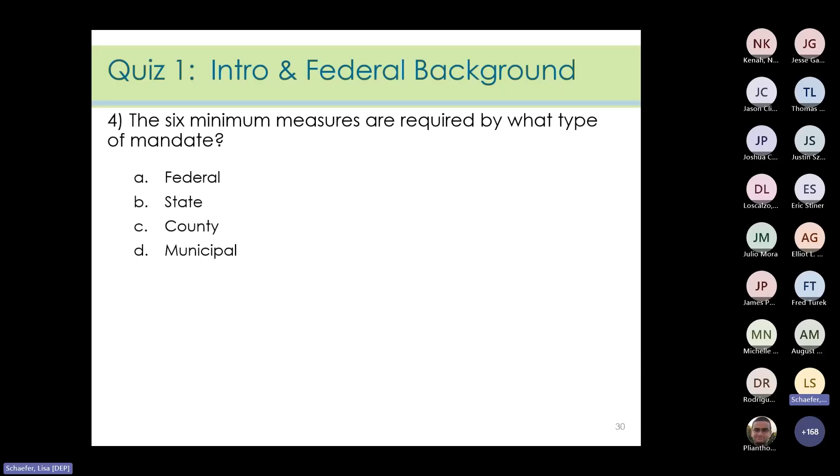The 6 minimum measures are required by what type of mandate? The answer is A. The National Pollutant Discharge Elimination System, or NPDES, Phase 2 stormwater regulations require that the 6 minimum measures be implemented for small MS4s.

Question 5: Reviewing site plans is required to comply with which statewide basic requirement? The answer is C. The post-construction statewide basic requirement requires that the permittee develop, update, implement, and enforce its stormwater management program to address runoff in new development and redevelopment, including reviewing projects to ensure they comply with the stormwater management rules.

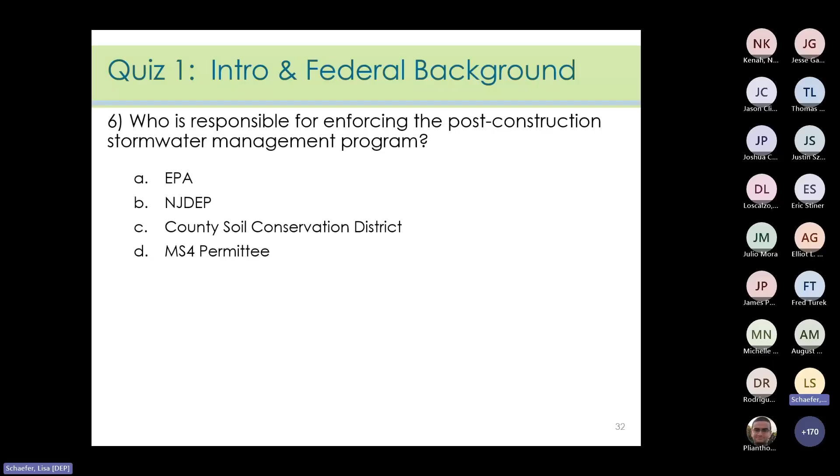Question 6: Who's responsible for enforcing the post-construction stormwater management program? EPA, NJDEP, the Soil Conservation District from the county, or the MS4 permittee? The answer is D. The MS4 permittee is required to develop, update, implement, and enforce its stormwater management program to address runoff in new development and redevelopment.

Question 7: Under the SCO pursuant to the 2026 rule amendments, what is the definition of major development? Is it the disturbance of 1 or more acres of land since February 2nd, 2004? The creation of 1/4 acre or more of regulated impervious surface since February 2nd, 2004? Or the creation of 1/4 acre or more of regulated motor vehicle surface since March 2nd, 2021? Or is it the reconstruction of 1/4 acre or more of motor vehicle surface or impervious surface since January 20th, 2026? The answer is E, all of the above.

Pursuant to the MS4 permit and NJAC 7:8, the SCO shall define major development as defined in subsection 1.2 of the Stormwater Management Rules.

Question 8: Which of these can be used to demonstrate compliance with the water quantity design and performance standard? There are 3 here, and the answer is B. Design stormwater management measures so that the post-construction peak runoff rates for the current and projected 2, 10, and 100-year storm events are 50, 75, and 80% respectively of the pre-construction peak runoff rates.

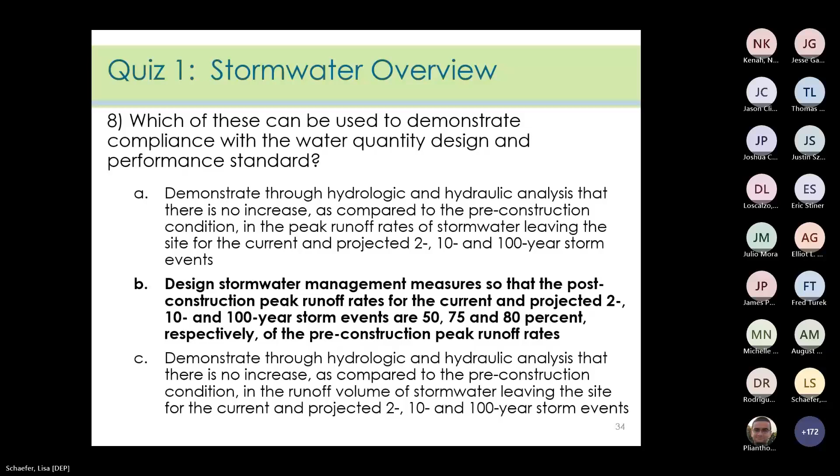Question 9: Which of the following is the New Jersey water quality design storm? Is it 1.25 inches in 2 hours, or 1.25 inches in 24 hours? Or is it the 1-year storm? Or is it 1 inch of rainfall? The answer is A. The New Jersey water quality design storm is a storm with a variable intensity that results in 1.25 inches of rainfall in 2 hours.

Question 10: For a project with 2 acres of asphalt parking, where the base of the motor vehicle surface will be completely removed and replaced with new roadbed materials and paved, is the project subject to the water quality design standard? The answer is yes.

Pursuant to NJAC 7:8-1.2, the replacement with new roadbed material is a disturbance and is also a reconstruction of motor vehicle surface. Therefore, the project is subject to the water quality standard at NJAC 7:8-5.5A.

Question 11: Which of the following would meet the groundwater recharge standard? The answer is D. Infiltrating the increase in the projected 2-year storm volume or maintaining the average annual groundwater recharge are the two options for meeting the groundwater recharge standard.

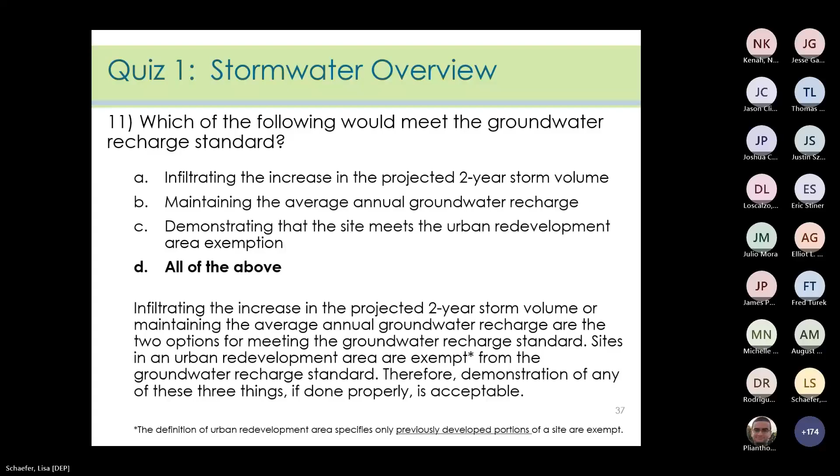Question 12: True or false? A project located in a tidal flood hazard area is always exempt from the water quantity standard. The answer is B, false. In tidal flood hazard areas, the water quantity standard does not apply only if the applicant can demonstrate that the increased volume of stormwater runoff will not increase flood damage below the point of discharge.

In tidal flood hazard areas, stormwater runoff quantity analysis is required unless the design engineer demonstrates through hydrologic and hydraulic analysis that the increased volume, change in timing, or increased rate of the stormwater runoff, or any combination of the three, will not result in additional flood damage below the point of discharge of the major development.

No analysis is required if the stormwater is discharged directly into any ocean, bay, inlet, or the reach of any watercourse between its confluence with an ocean, bay, or inlet and downstream of the first water control structure.

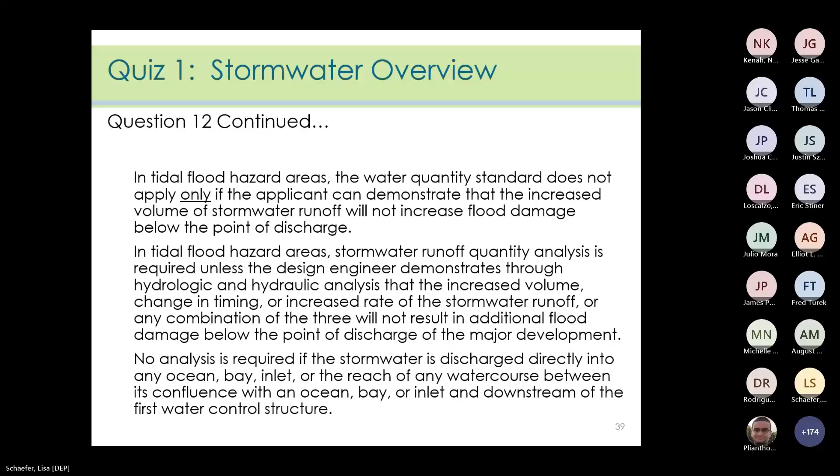Question 13, true or false? BMPs from table 5-3 can be used to meet stormwater quality requirements without obtaining a waiver or variance from NJAC 7:8-5.3. The answer is false. BMPs from table 5-3 can be used for stormwater runoff quantity only. For them to be used for stormwater runoff quality, a waiver or variance from subsection 5.3 in the rules must be obtained.

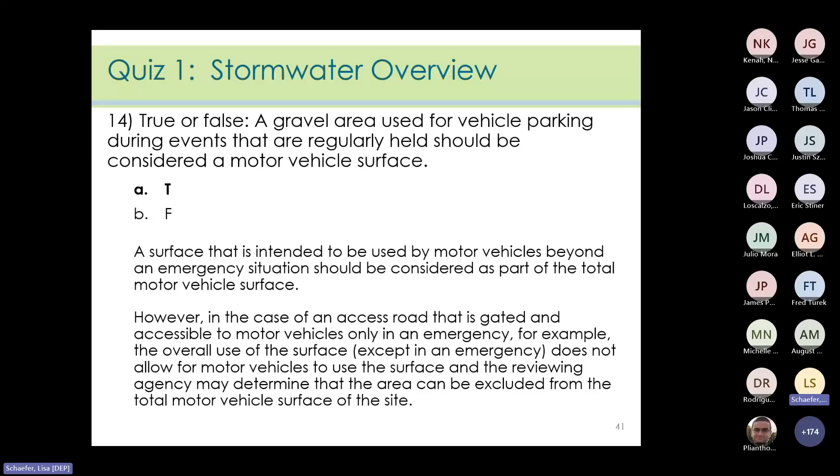Question 14, true or false? A gravel area used for vehicle parking during events that are regularly held should be considered a motor vehicle surface. The answer is true. A surface that is intended to be used by motor vehicles beyond an emergency situation should be considered as part of the total motor vehicle surface. In the case of an access road that is gated and accessible to motor vehicles only in an emergency, the overall use of the surface, except in an emergency, does not allow for motor vehicles to use the surface, and the reviewing agency may determine that the area can be excluded from the total motor vehicle surface of the site.

Question 15. Which of the following is required in a maintenance plan? Cost estimates, specific preventative and corrective maintenance tasks, the name, address, and phone number of the responsible party, or all of the above? The answer is all of the above. All of these things must be included in the maintenance plan.

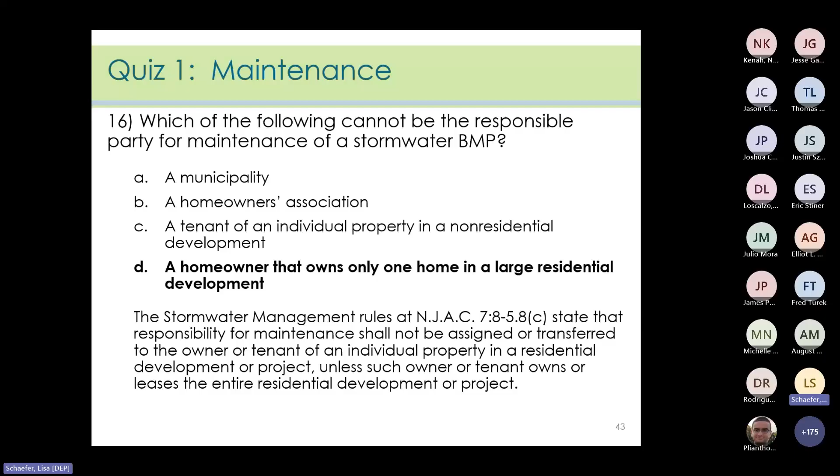Question 16. Which of the following cannot be the responsible party for maintenance of a stormwater BMP? Is it a municipality, a homeowners association, a tenant of an individual property in a non-residential development, or a homeowner that owns only one home in a large residential development? The answer is D. The stormwater management rules at NJAC 7:8-5.8C state that the responsibility for maintenance shall not be assigned nor transferred to the owner or tenant of an individual property in a residential development or project unless such owner or tenant owns or leases the entire residential development or project.

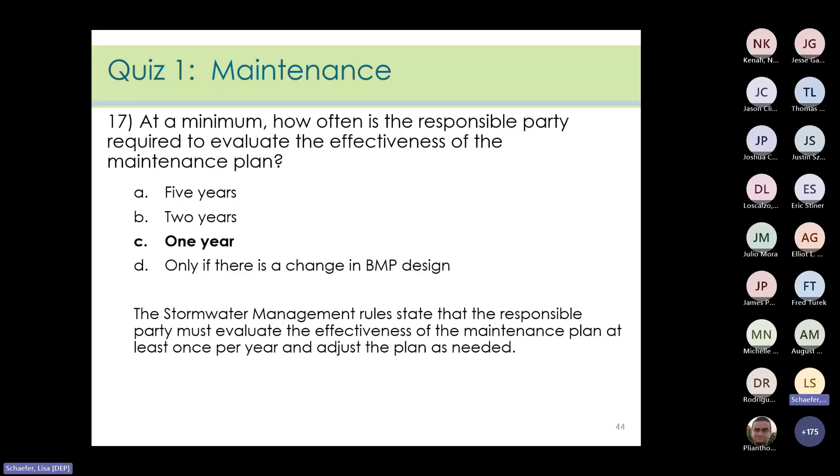Question 17. At a minimum, how often is the responsible party required to evaluate the effectiveness of the maintenance plan? Is it 5 years, 2 years, 1 year, or only if there's a change in the BMP design? The answer is 1 year. The stormwater management rules state that the responsible party must evaluate the effectiveness of the maintenance plan at least once per year and adjust the plan as needed.

17. I'm sorry. What? Yeah.

Question 18, true or false? All maintenance plans for stormwater management measures must be recorded on the deed of record for each property on which the maintenance must be undertaken if the responsible party is not a public agency. The answer is true. Per subsection 5.8 of the stormwater management rules under item D, if the person responsible for maintenance is not a public agency, the maintenance plan and any future revisions shall be recorded upon the deed of record for each property on which the maintenance must be undertaken.

Question 19, true or false? When choosing a hydrodynamic separator type MTD, the inlet configuration, such as the angle and number of inflow pipes, must strictly match the inlet configuration described in the NJCAT verification report. The answer is true. When the NJDEP certifies an MTD, such as a hydrodynamic separator type, only the configuration as tested by NJCAT is certified to provide the indicated TSS removal rate. Manufacturers will frequently offer other configurations claiming certification, and these will include an inlet or outlet configuration that is not 180 degrees apart and may have multiple inlet pipes.

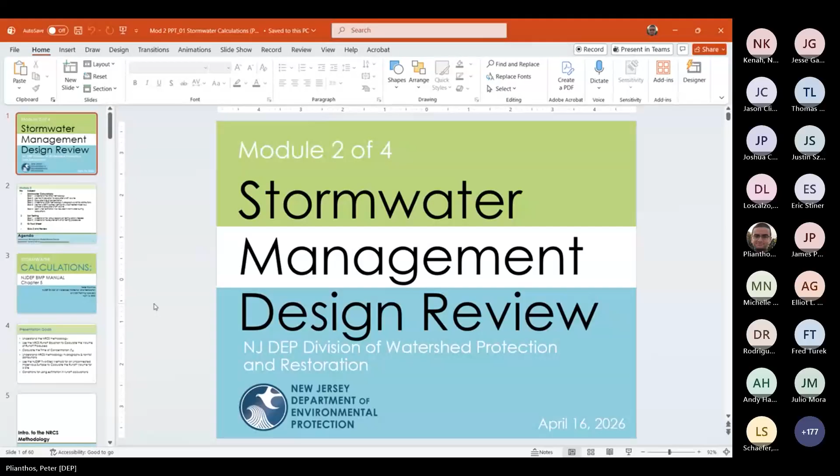All right, so good afternoon, everyone. Once again, my name's Peter, and let's really get into Module 2 now of the Stormwater Management Design Review course after Lisa went through that quiz review that was carried over from Module 1.

So here's the agenda for today for the remainder of Module 2. We'll begin the day with a presentation on stormwater calculations presented by myself. Then we'll move on to soil testing presented by Lisa Schaefer. And lastly, green infrastructure, focusing on the GI fact sheet, also presented by Lisa Schaefer. After those three presentations, we'll have quiz number 2, and the end of the day will be the quiz review, which will be presented by me.

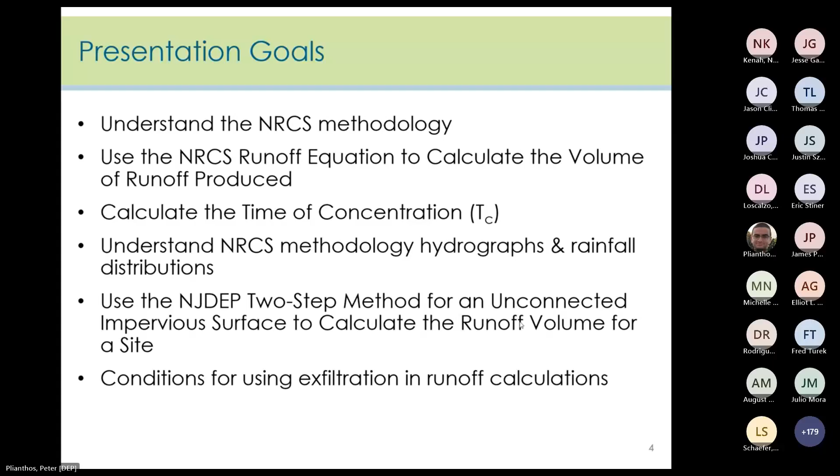So first, we'll take a closer look at the NRCS methodology.

Per NJAC 7:8 5.7, the design engineer shall calculate runoff using the NRCS methodology, as described in the National Engineering Handbook, or NEH, and as additionally described in Technical Release 55, or TR55. However, please note that the TR55 manual has been superseded by Part 630 of the National Engineering Handbook, and if you are using the TR55 manual, you'll be using outdated equations and values. A link to the NEH is provided at the bottom of this slide for that reason.

As mentioned before, the NRCS method is used to calculate the peak flow rate and volume of runoff and to produce hydrographs, which are flow of water over time. The NRCS method uses unit hydrographs, rainfall depths, rainfall distributions, curve numbers, and times of concentration, which are all dependent on geographical and topographical differences that affect how rain will fall over a specific area. We'll review all of that on the upcoming slides.

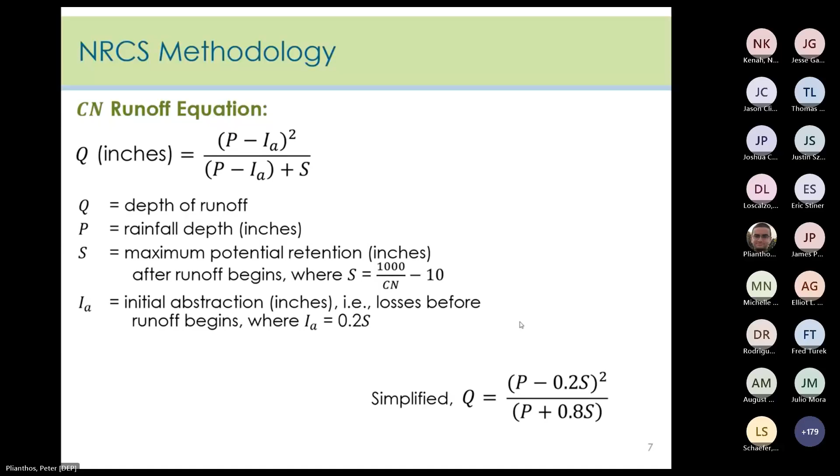The curve number, once again abbreviated CN, is an empirical parameter used for predicting infiltration and direct runoff from rainfall. CN is a function of the hydrologic soil group, or HSG, and the land cover, such as woods, open space, agricultural use, impervious cover, etc.

HSG A is the most permeable soil group and produces the least amount of runoff when thoroughly saturated. The designations then go alphabetically from B to D, with D being the least permeable soil group and having the highest runoff potential.

The preliminary HSG classification can be found on the NRCS Web Soil Survey website, but further investigation may be necessary, and Lisa will dive deeper into all of this in the next presentation. Once you have determined your HSG, or are using the defaults that are allowed, you can determine the CN value to input.

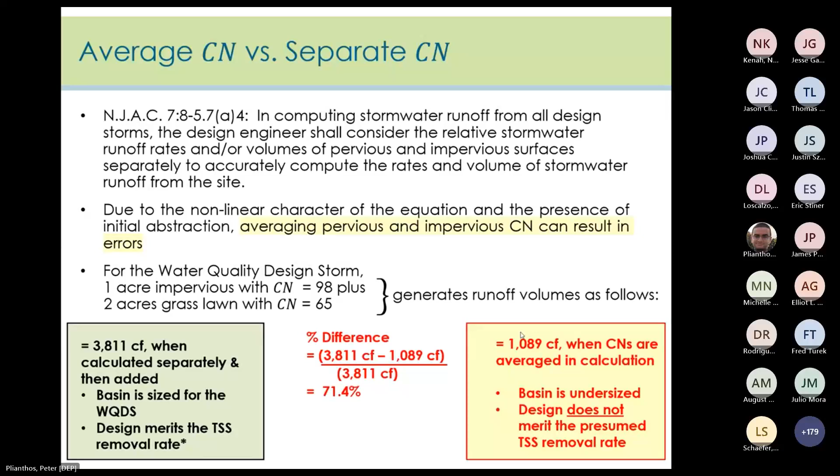Starting with the CN values for each segment from Table 9-5 in the National Engineering Handbook, the CN value for the pervious area, which is lawn area with HSG of A, is 39. And as mentioned before, the CN for the impervious area is always 98.

Next, using the CN runoff equation, we'll calculate S, which again is the maximum potential retention, also known as the maximum infiltration capacity of the land surface and soil. This is where the major difference is. You have 15.64 for the lawn area and 0.204 for the impervious area.

When talking about time of concentration and point of analysis, we are talking about a drainage area. A drainage area is a portion of land where all the stormwater runoff produced by that area converges to a single point, a point of analysis.

It's extremely important to remember when reviewing plans that a drainage area does not stop at the property line. You have to look at the offsite area surrounding the property. A project can have one drainage area or multiple. There can be small drainage areas and big drainage areas. It really depends on the topography and potentially the stormwater management infrastructure, because perhaps, even though topographically the water is going one way, if it enters a stormwater management system, it could be directed somewhere else.

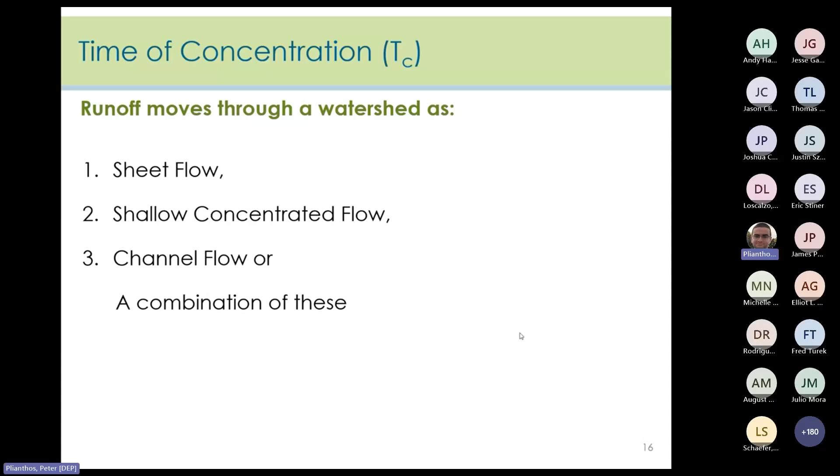Looking at these more closely, sheet flow is usually at the headwaters and over plane surfaces. This is where runoff forms a sheet that is low in energy and also low in velocity and depth, so the depth would be less than 0.1 feet.

Shallow concentrated flow occurs where runoff begins to merge and concentrate, hence the name. The velocity and depth increase, so there's a slightly higher energy, but there is still no well-defined channel.

And lastly, channel flow can be seen in aerial photographs and on GIS and USGS maps, blue lines for streams or dashed lines for pipes. It is a well-defined channel, open or closed, so a stream or a pipe, that has deeper and faster flow, so that would be the highest energy level.

Now that we've covered the properties that affect the time of concentration and the types of flow you can expect to see, let's take a look at the actual equations.

From the National Engineering Handbook, the velocity method can be used to calculate the time of concentration. This method assumes that the time of concentration is the sum of the travel times for each segment of flow along the hydraulically most distant flow path. We'll talk about what a segment is over the next few slides.

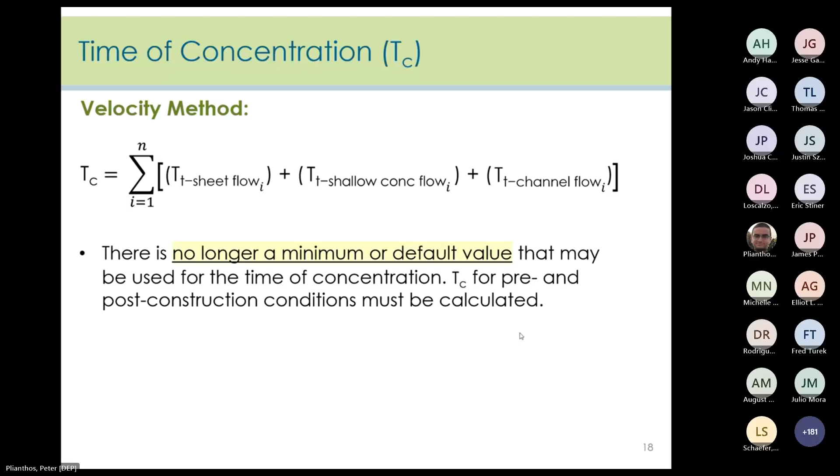Additionally, the maximum sheet flow length, as per the National Engineering Handbook, is 100 feet for pre-construction conditions. However, the sheet flow can be less if there is a physical constraint that prevents sheet flow from occurring, such as coming into contact with a curb, swale, or inlet. But the maximum is 100 feet.

Now for the post-construction conditions, the maximum sheet flow length should not exceed either the McCuen-Spiess limitation or 100 feet, whichever is less.

So if the sheet flow length calculated by the McCuen-Spiess limitation criteria is less than 100 feet, you have to use that length. But if the sheet flow length determined by the McCuen-Spiess limitation is more than 100 feet, the sheet flow length must be limited to 100 feet.

And remember, the sheet flow length can be less than both of these values if there is a physical constraint present that prevents sheet flow from occurring, just like in the pre-construction conditions.

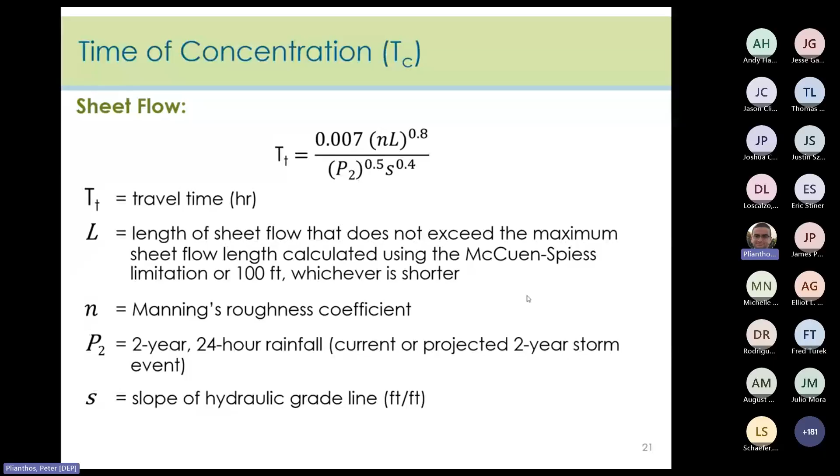Diving into Manning's roughness coefficient, values for sheet flow can be found in Table 15-1 of the National Engineering Handbook. For sheet flow, the roughness coefficient includes the effects of surface roughness, the effects of raindrop impact, the effects of obstacles, and the effects of erosion and transport of sediment. And the values range from 0.011 for smooth surfaces to 0.8 for dense underbrush.

However, per Chapter 5 of the BMP manual, the maximum value that can be used for woods in New Jersey is 0.4, which corresponds to light underbrush. So you should never see an N value greater than 0.4 being used for sheet flow. If you do, it's wrong.

Diving into the 2-year 24-hour rainfall, typical values in New Jersey range from 3.2 to 3.5. The overview presentation for Module 1 described how to get the rainfall depth for a location using either the county data or the NOAA data. So I won't go over that again.

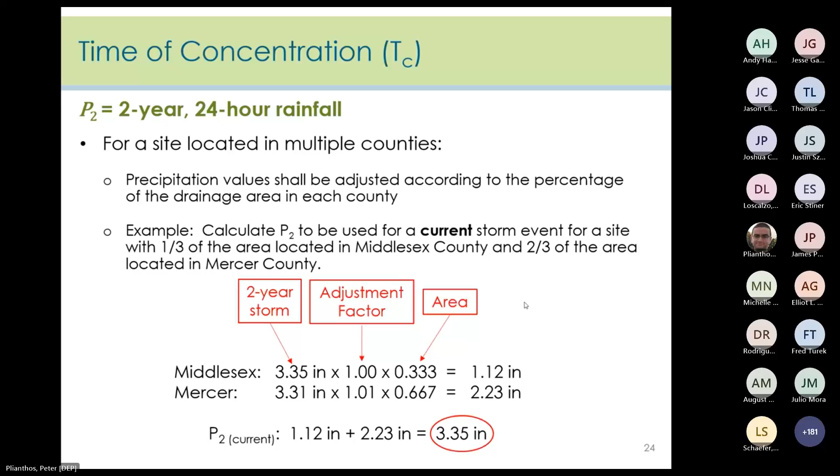All right, so that was everything for sheet flow. Let's take a look at the equations for shallow concentrated flow.

Travel time for shallow concentrated flow is determined using a very simple distance over speed relationship. More specifically, the travel time is equal to the flow length divided by the average velocity times a conversion factor of 3600 to convert seconds to hours.

And per the National Engineering Handbook, it is assumed that shallow concentrated flow can be represented by one of 7 flow types, and that's how the velocity will be determined.

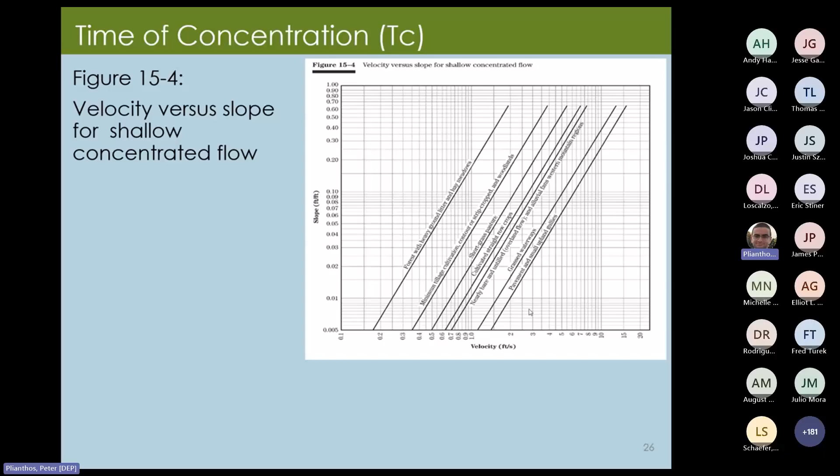You need Manning's roughness coefficient, which can be obtained from standard hydraulics textbooks, the length of the channel, the hydraulic radius of the channel, and the channel slope.

More specifically, the hydraulic radius is the cross-sectional flow area of the channel divided by the wetted perimeter. And the wetted perimeter is the length of the cross-section actually in contact with the water.

This hydraulic radius parameter aims to take into account the effects of friction along the channel, because that friction slows the water down.

Please note that this equation can be used for open channels, like streams and rivers, and for partially full gravity pipes, so your typical stormwater pipes. However, if you see a pressurized pipe, that is a completely different equation. Thankfully, you shouldn't see that too often.

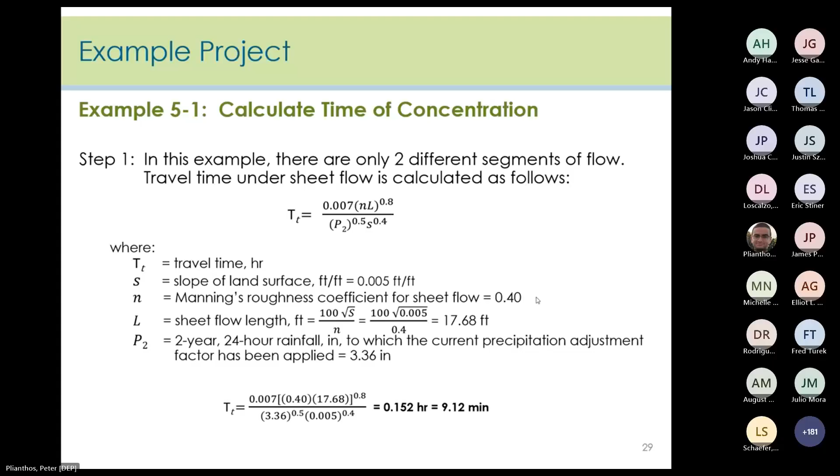Now, because the entire flow path is 1,000 feet, but the sheet flow was only 17.68 feet, we have to calculate the travel time for shallow concentrated flow over the remaining 982.32 feet.

Using figure 15-4 from the National Engineering Handbook, we know that the land cover is woods, and we know that the slope is 1%, or 0.01 feet per feet. So if we go up to 0.01 on the y-axis and go right over to where our land cover intersects with this slope, we can then go down to the x-axis to get our velocity, which is 0.25 in this case.

Plugging all of that into our equation, we get a travel time of 65.49 minutes. And finally, the time of concentration is the sum of travel times for each segment of flow along the hydraulically most distant flow path, which is 74.61 minutes in this case.

So hopefully that example made sense to everyone, but if not, please drop your questions in the chat.

The first thing we need to do is discuss the different types of hydrographs. In a perfect world, we would use what's called a natural hydrograph, which is obtained directly from the flow records of a gauged stream. However, because this is based on past data and may be limited or unavailable, we use dimensionless unit hydrographs, or DUHs, to create synthetic hydrographs to predict what a storm will look like.

A dimensionless unit hydrograph, or DUH, is basically a template or shape of how a watershed responds to rain. It doesn't have actual numbers yet, it just shows the pattern of rising and falling of runoff, and they are based on generalized empirical data.

The most common one is the SCS, or Soil Conservation Service, DUH. But there are other regional ones as well, such as the Delmarva, which stands for Delaware, Maryland, and Virginia, which takes into account some regional characteristics. These DUHs are then scaled based on watershed area, rainfall depth, and duration to produce a synthetic hydrograph.

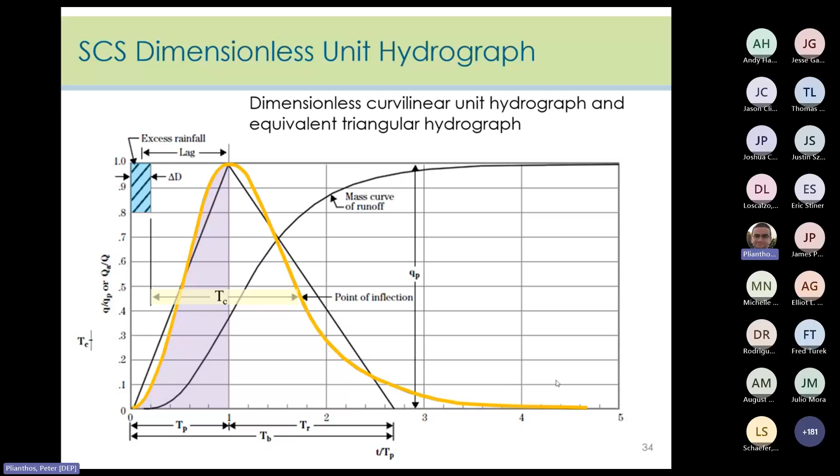So when do you use one over the other? As mentioned before, the Delmarva dimensionless unit hydrograph is particularly suited for flat coastal areas with slopes less than 5%, typically the coastal plain physiographic province of New Jersey, aka South Jersey.

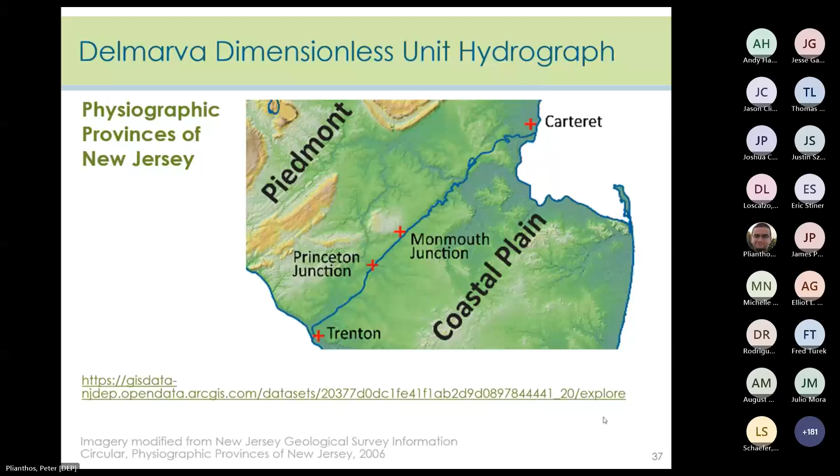Another helpful tool is this interactive GIS application where you can type in your site address and find out which physiographic province you are in. There's a link to that on the bottom of this slide.

So when not to use the Delmarva dimensionless unit hydrograph? The Delmarva dimensionless unit hydrograph cannot be used outside of the coastal plain. It cannot be used in the sizing of an MTD because it will underestimate flow rates. It also cannot be used when coastal plain characteristics do not actually exist.

So yes, maybe the site is physically within the coastal plain region, but if it is a completely paved site or has slopes greater than 10%, the SCS should be used to better model this.

So in addition to the rainfall depth, or the amount of rain, we need to know how rain falls during a storm, and this is called rainfall distribution.

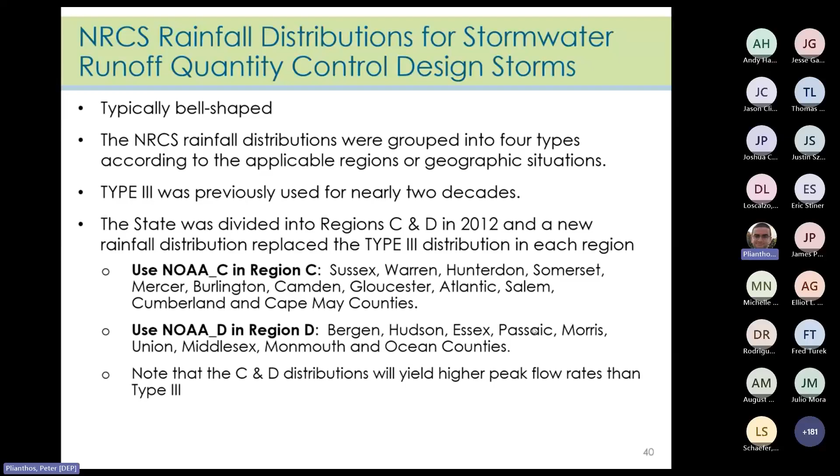So specifically in New Jersey, we previously used the Type 3 distribution. Now there are the NOAA-C and NOAA-D distributions, and you can expect to see higher peak flow rates with these distributions. These distributions used to be solely based on county, but now the distributions don't exactly follow county lines. So this is something you will have to check when you are reviewing.

All right, so now we are going to do an in-depth example of how to apply the adjustment factors.

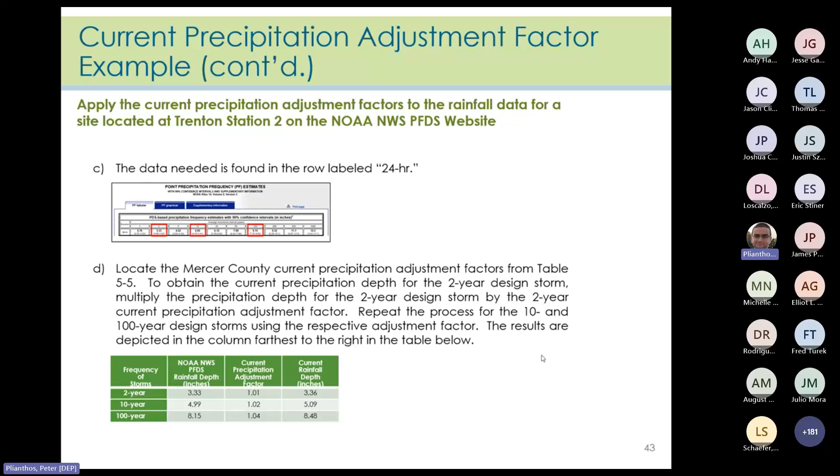Moving on to goal number 5, we're going to talk about unconnected impervious cover and how to use the NJDEP two-step method to calculate the runoff volume for a site.

So what exactly is unconnected impervious cover? Unconnected impervious area means that stormwater runoff travels as sheet flow onto an adjacent pervious area, along with meeting some other requirements, before reaching the downgradient BMP. Essentially, the impervious area is not directly connected to the BMP.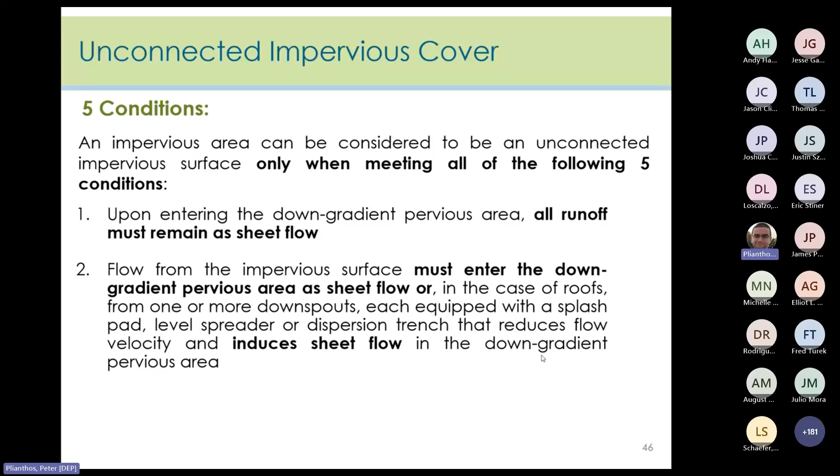And the last 3 conditions basically ensure stability and maintain sheet flow. So again, I'll just give a moment for the slide to be read. For this reason, the maximum slope of downgradient pervious areas is 8%.

There are 2 methods that may be used to calculate runoff from unconnected impervious areas, and there are 3 additional requirements applicable to either method.

The first requirement: only the portions of the impervious surface and downgradient pervious surface on which sheet flow occurs can be considered in this calculation. Number 2, the maximum sheet flow length along the impervious surface is 100 feet. And lastly, number 3, the minimum sheet flow length along the pervious surface is 25 feet.

The 2 methods to calculate runoff from unconnected impervious areas are the NRCS composite CN with unconnected impervious area method, from Chapter 9 of the NEH, which has a 30% limitation on the ratio of impervious area to total area, and the NJDEP two-step method, which we will cover now.

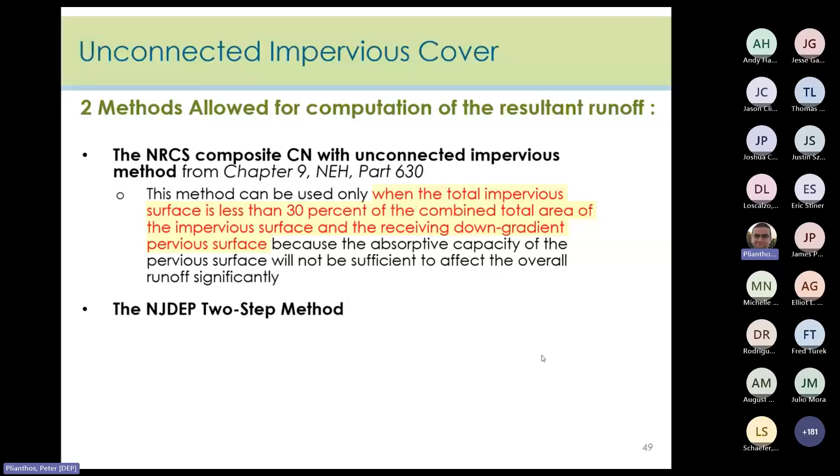So let's get right into this example. We have a 25-foot impervious area, which meets the 100-foot maximum requirement, and a 75-foot downgradient pervious area, which meets the 25-foot minimum. The impervious area has a CN of 98, and the pervious area has a CN of 39. The 2-year design storm depth is 3.5 inches.

And we're going to ignore adjustment factors for the purpose of this example. We'll just assume that it's already been adjusted. The first step is to compute the runoff from the impervious area.

To do that, we will use the CN runoff equation that we talked about in the beginning of this presentation. Plugging in the P2 value and the CN value, we get 3.27 inches. Multiplying that by the surface area, which is 200 feet by 25 feet, we get 1,362.5 cubic feet.

The next step is to convert the runoff from the impervious surface to a hypothetical rainfall depth over the pervious area. We'll do this by back-calculating a P2I value using the surface area of the pervious area and converting units as needed.

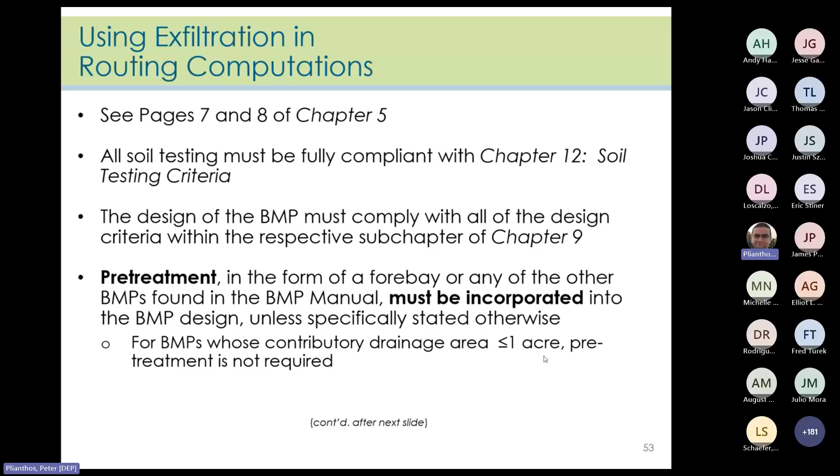So let's talk a little bit more about pre-treatment, because that requirement extends beyond just using exfiltration in the routing calculations. Pre-treatment is an important design criteria for all BMPs. And if you do not see pre-treatment listed under the basic design criteria for a particular BMP, it's under the type-specific design criteria.

However, the requirement for pre-treatment of roof runoff can be waived under the conditions listed here. For example, a building that is significantly higher than any surrounding trees and does not have a vegetated roof should not need the pre-treatment. However, in making this determination, the review agency must consider the mature height of any surrounding trees. And this waiver does not apply if the roof runoff commingles with other stormwater runoff.

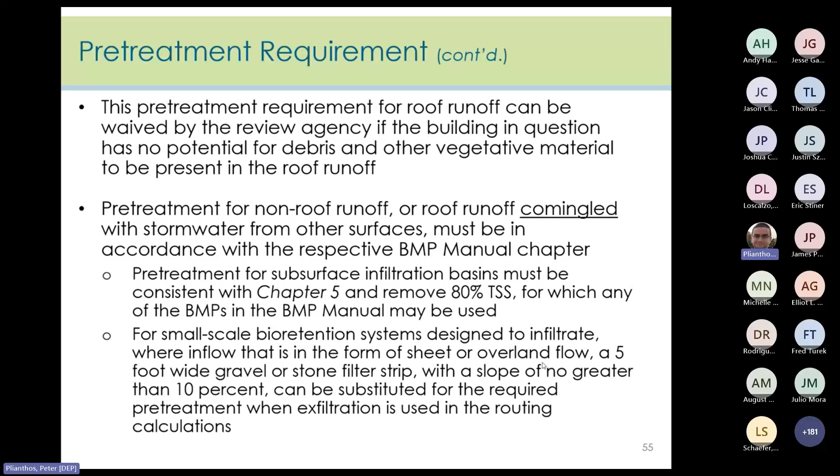Now back to the requirements for using exfiltration. Where can't you use exfiltration? Exfiltration cannot be used with any underdrained BMPs because the entire premise of exfiltration is infiltration, and with underdrains you are not infiltrating.

Additionally, exfiltration cannot be used for the entire 2, 10, or 100-year current and/or projected storms, except under certain conditions listed here. For example, if you have no runoff leaving the site in pre-construction conditions, you can exfiltrate that entire storm in the post-construction conditions.

Additionally, another review agency, such as the Pinelands, may require storms larger than the water quality design storm to be infiltrated.

In addition to this, the soils must be tested in accordance with Chapter 12 of the BMP Manual, and the groundwater mounding analysis must be completed in accordance with Chapter 13 to ensure no adverse impacts to the groundwater or surrounding structures.

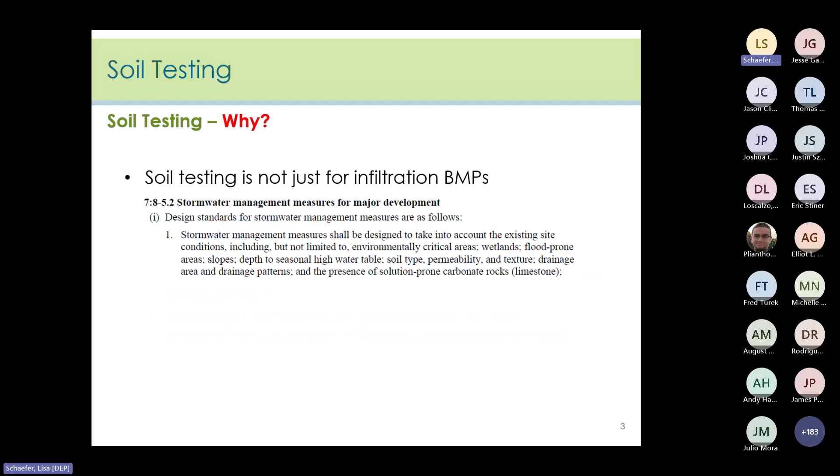Lastly, the saturated hydraulic conductivity, which generally speaking is the ability of a saturated soil to transmit water, is used in BMP design and for the input parameters in a groundwater mounding analysis. So we're going to take a look at all the requirements for all of these.

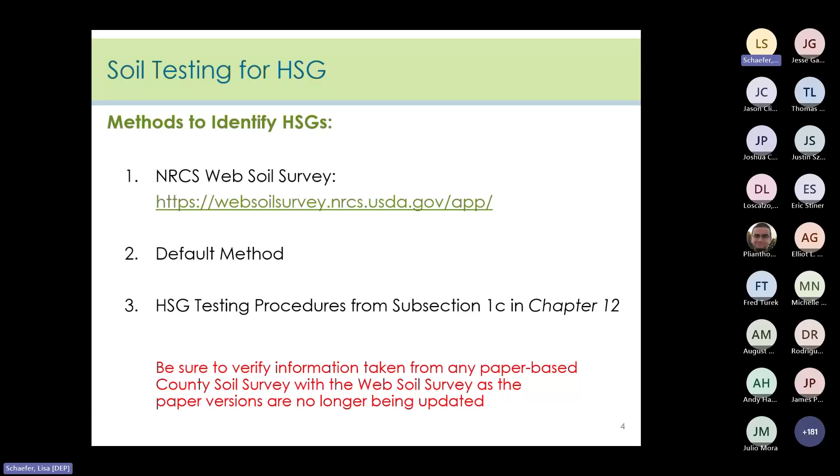However, if someone made a submission and forgot to include it in their submittal, you can get it yourself and continue checking parameters without having to wait for them to get that to you. But there's more information on the steps in chapter 12 on using the web soil survey if you've never done it before.

Once you're on the website, you're just going to click the start button. I'm going to give you the abbreviated version - everything is in chapter 12.

You're going to define your area of interest, which is the AOI for short. You're either going to do that by zooming into your project location or by entering the address. Then you're going to use either the polygon or rectangle option to draw your AOI around your site.

I like to make them pretty close, and then I check them against the area, maybe on the cover sheet of the plans for the property in question. Make sure your area is correct in size, and then you're going to look under the AOI properties pull down menu to see that.

Next thing you're going to do is very simply go to the Soil Data Explorer tab - you'll see this on the next slide. Then you're going to go to the middle tab labeled Soil Properties and Qualities, and there's a pull down menu where you'll find your hydrologic soil group sub-menu.

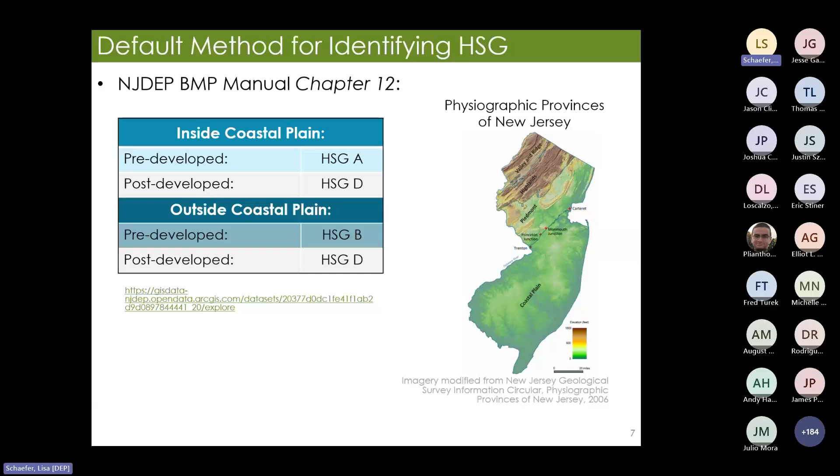That will take you to the Bureau of GIS for their interactive website, and you can enter your location to find out in which province your address is located. So when it's zoomed out, when it first starts, this is what it looks like. The page is interactive, and you can actually zoom in enough to differentiate between two houses on the street.

You also need to know the HSGs on a site when using the groundwater recharge spreadsheet. Table 12-2 in the chapter was updated to show the default soil series for recharge computations. This table is on page 6 in the chapter, then go to page 10 for the discussion. We'll also cover this a little bit in module 3.

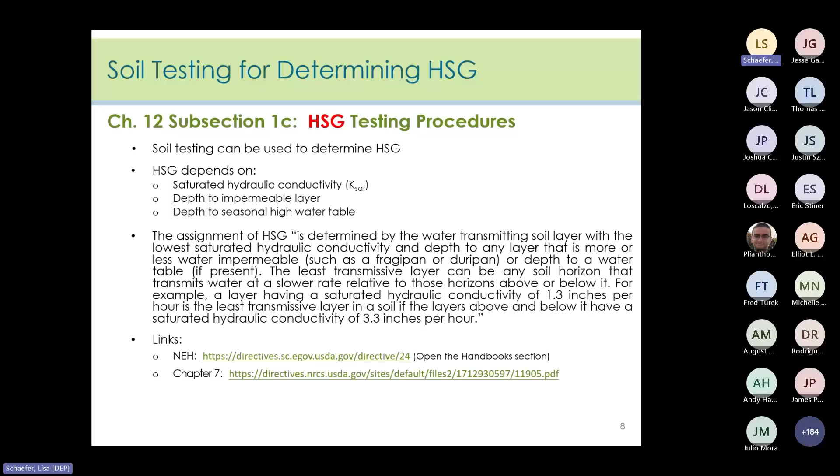So again, we have another quote. Certain wet soils are placed in group D based solely on the presence of a water table within 24 inches of the surface, even though the saturated hydraulic conductivity may be favorable for water transmission. If these soils can be adequately drained, then they're assigned to dual hydrologic soil groups, A/D, B/D, and C/D, based on their saturated hydraulic conductivity and the water table depth when drained.

Okay, the first letter is the drain condition and the second is the undrained condition. So for the purpose of HSG, adequately drained means that the seasonal high water table is kept at least 24 inches below the surface in the soil where it would be higher in a natural state.

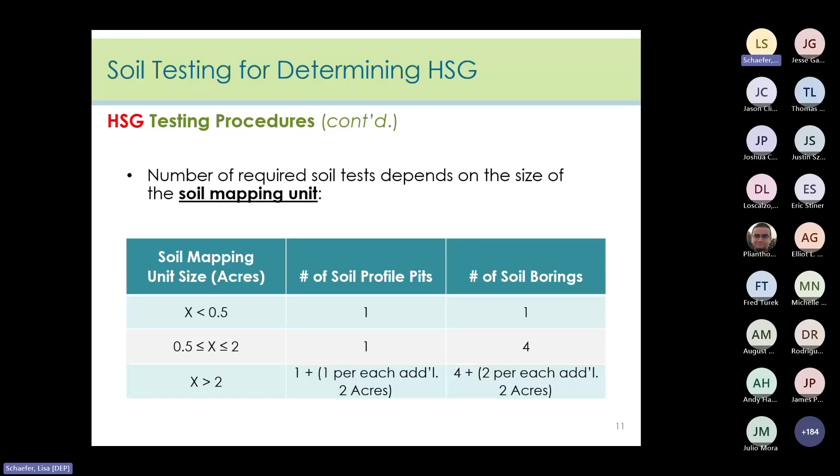Let's look at the required number of soil profile pits and soil borings that are required for soil testing that is performed to determine the hydrologic soil group. So for each soil mapping unit that is less than 0.5 acres, you will need 1 pit and 1 boring. For each soil mapping unit that is between 0.5 and 2 acres, 1 pit and 4 borings are required. And for each soil mapping unit that is greater than 2 acres, 1 pit plus 1 pit for each additional 2 acres, and 4 borings plus 2 more borings for each additional 2 acres are required.

There's also a depth requirement for determination of HSGs. In the earlier version of this chapter, back when it was Appendix E, you had to go 6 feet. Chapter 12 has been changed. It requires at least 40 inches, okay? So the presence and depths of the soil classifications must be included in the soil logs.

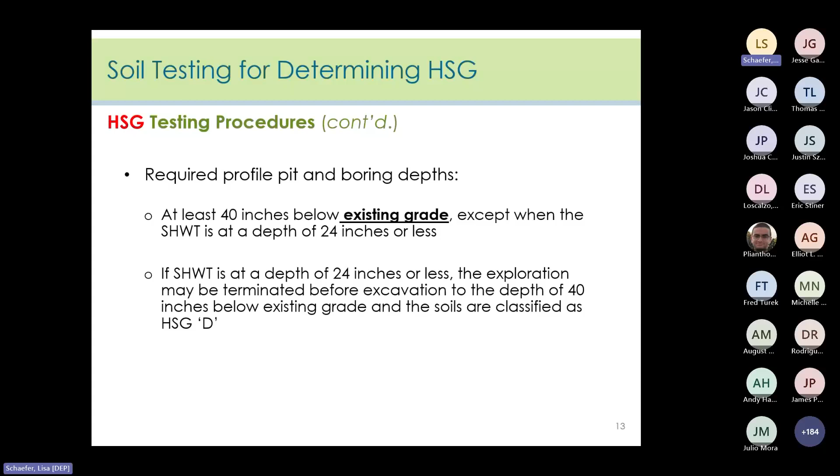Next, we're going to look at the requirements for soil testing to determine the location of the seasonal high water table, and that information is found in Chapter 12 in subsection 1D.

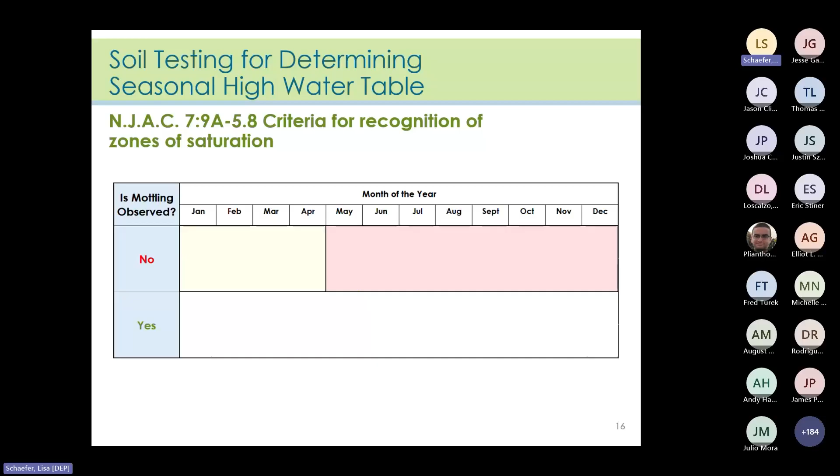We're going to start with the simple case: what applies when the answer to the question of whether mottling is observed is yes.

Where mottling showing redoximorphic features is observed at any time of the year, the seasonal high water table is taken at the highest level at which the redoximorphic features are observed, except when the water table is observed at a level higher than the level of the redoximorphic depletions or concentrations. So if the water table is higher in elevation than those features, use the higher elevation.

On the other hand, if the water table is located at a lower elevation, or if no water is observed within the exploration, use the elevation of the mottling showing redoximorphic features as the location of the seasonal high water table. For details on determining whether saturated soils are present, there's a guidance document published by the NRCS called Field Indicators of Hydric Soils in the United States, and you can use it.

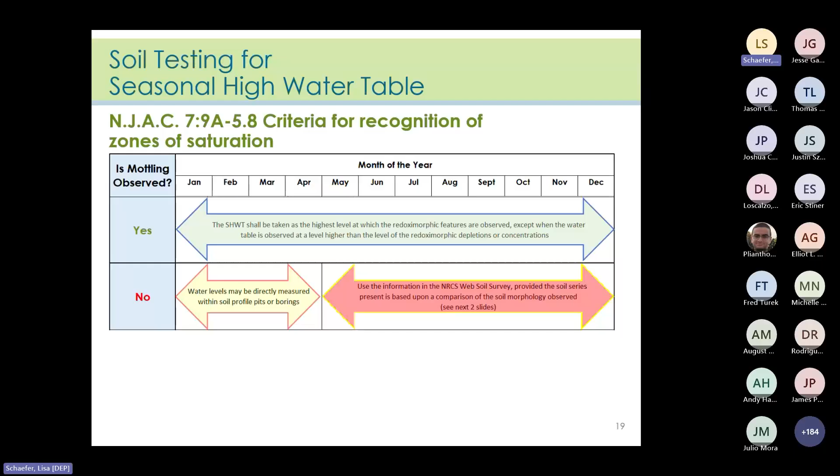However, for testing done outside of January through April, if you do not see redoximorphic features, you follow the text in 7:9A-5.8(b), which stipulates a comparison of the soil profile morphology observed with the information in the Web Soil Survey is needed to identify the soil series present on the site.

So for those of you who prefer text over graphics, Chapter 12 also has some really great tables. 12-5 is the table that applies when mottling showing redoximorphic features is observed within the soil exploration, and that's on page 12 of Chapter 12.

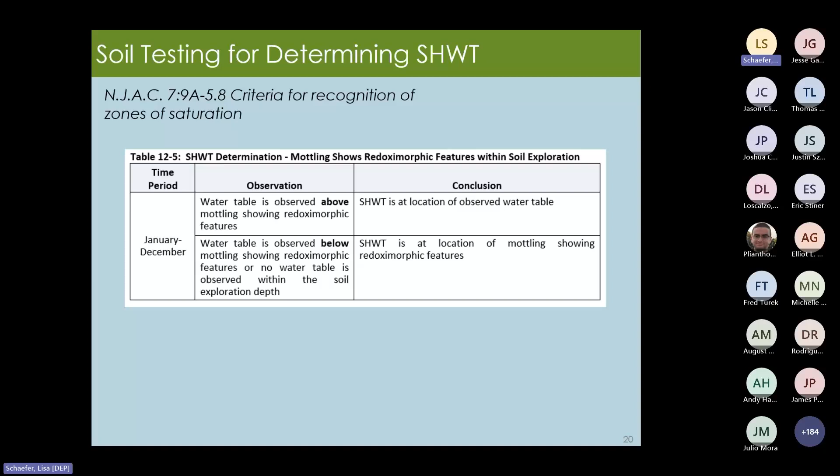And 12-6 is where no observation of mottling showing redoximorphic features and whether or not the water table is observed for the January through April timeframe.

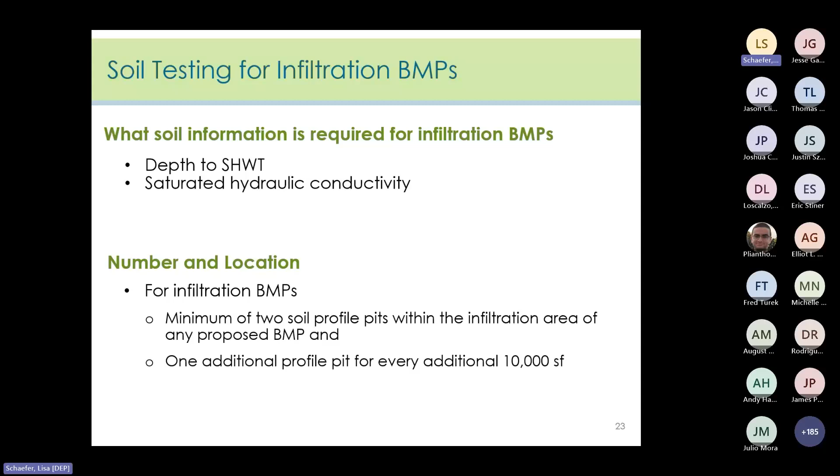So speaking of examples, let's do one. We're going to look and determine the number of soil profile pits needed for an infiltration BMP with a bottom area measuring 100 feet by 250 feet and is 25,000 square feet in area.

So the next few slides, we'll look at the number and location of tests for special types of infiltration BMPs. And then we'll look at the requirements for small scale and then linear BMPs. And then we'll go on to some other tests that we need to perform for all infiltration BMPs.

So for small scale infiltration BMPs, when we have 1 or more small scale GI BMPs, we need 1 soil profile pit for each soil mapping unit where the multiple BMPs are located. For each BMP with an infiltration area of less than 5,000 square feet, you're going to need 1 soil boring at each BMP. And then for those BMPs with an area that is greater than 5,000 square feet, you need 2 soil borings at each BMP.

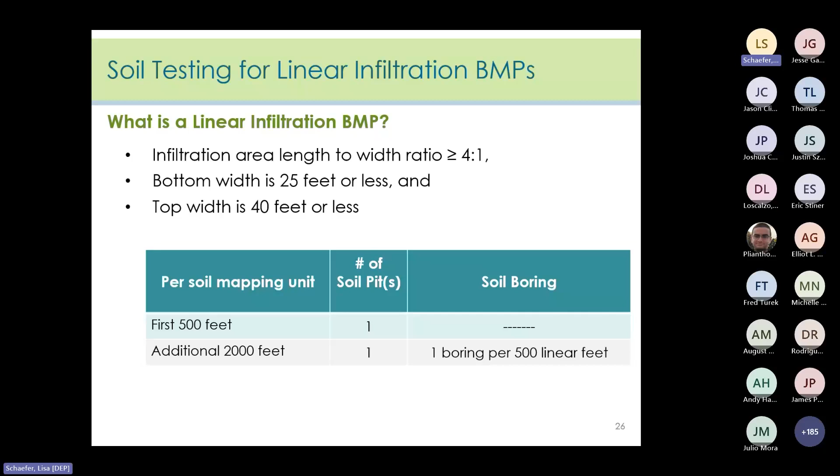For the second example, this is a linear infiltration BMP with a total length of 2,500 feet, all within one soil mapping unit. What is needed is a required pit for the first 500 linear feet, followed by one boring for each additional 500-foot increment, and one more pit for the additional 2,000 linear feet located after the first. These are found in Figure 12-4 of the chapter.

Let's continue with the other soil tests needed for infiltration BMPs. Those are the tests to determine soil hydraulic conductivity, depending on whether or not soil replacement is proposed. For no soil replacement, after determining the numbers and locations of the soil profile pit for infiltration BMPs, you have to decide the depth of the soil profile pit.

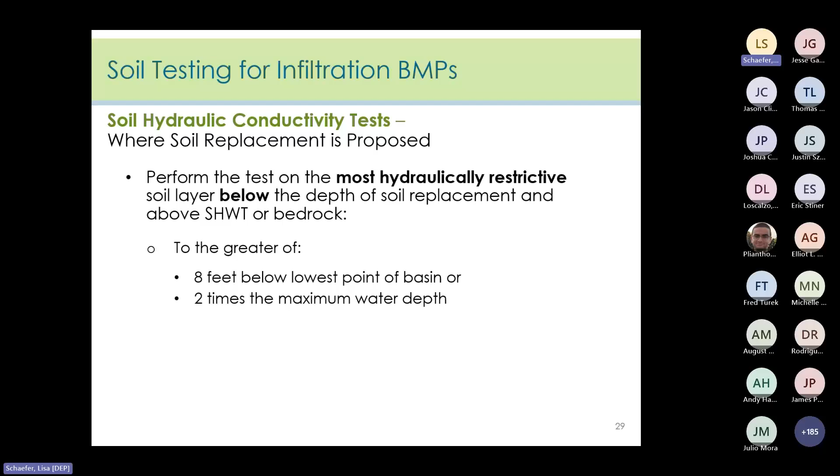We've seen in our audits that the soil hydraulic conductivity test is performed at the top of the soils to be replaced, but doesn't include the depth of the replacement. And that's just wrong.

Up next is a discussion of what test methods are acceptable for this type of soil testing, and you'll find this in Section 3 of Chapter 12. Soil hydraulic conductivity tests can be determined using a tube permeameter test, a percolation test, a single ring infiltration test, a basin flooding test, or a modified basin flooding test. But please read the specific conditions published in Chapter 12 under which these tests can be used.

Now there are additional methods of establishing soil hydraulic conductivity: ASTM D3385, the double ring infiltrometer, and USBR 7300-89, the well permeameter method, or other soil hydraulic conductivity tests that utilize in situ conditions and are accompanied by a recognized published source.

That would be like your Guelph permeameter, your Philip-Dunne permeameter, available at the Soil Science Society of America book series, number 5, Methods of Soil Analysis, Part 1, Physical and Mineralogical Methods, by Klute, dating back to 1986.

But too often in our audits, we've seen that disturbed samples are used for lab testing. Please, in your reviews, make sure undisturbed soil sampling is performed for your soil boring explorations when used in any laboratory-based test.

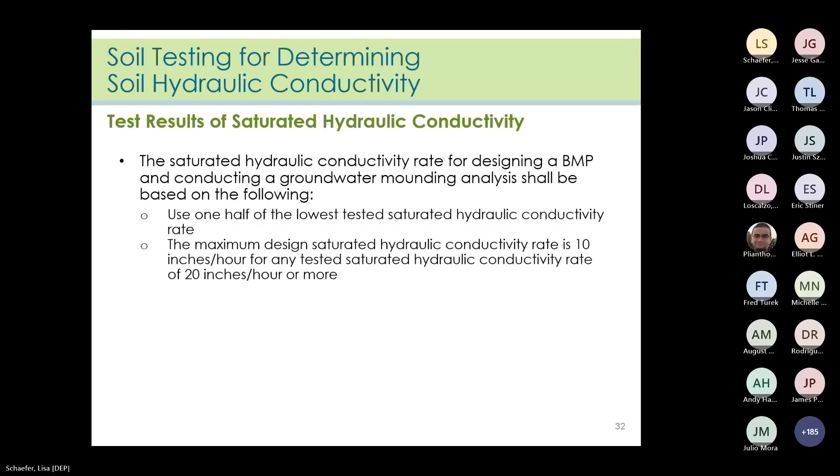The test procedures and conversion equations for the tests shown are available in Chapter 12, and there are also worksheets for some of these. So you're going to see them here, and this is what page to look at them. Pretty straightforward. However, the cased borehole infiltration test was previously suspended for further assessment.

The ASTM standard for this test indicates it's not suitable for cohesionless soils, and upon closer review, the soils for which this test would be appropriate would have saturated hydraulic conductivity ratings below the minimum permitted for an infiltration BMP, and as a result, this test has been removed from Chapter 12.

But for your double ring infiltrometer, your well permeameter, and the other permitted testing results, you're going to get them from the American Society for Testing and Materials, or the organization that published the testing method.

For the percolation test, you're going to follow the procedures described in Chapter 12. The field measured hydraulic conductivity value is calculated using this simplified equation. It's in the chapter, in case you don't have your handouts handy.

You want to take note that although test step B in the procedure for the perk test requires you to fill the water to a depth of 7 inches, the time of recording is started when the water level drops down to the 6-inch mark, and stop when the water in the hole is empty. So you've got that extra 1 inch.

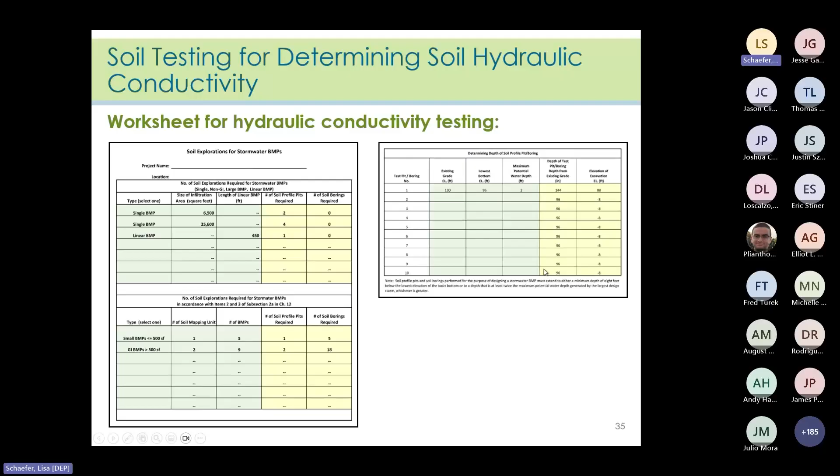So you've got the number of profile pits and borings required depending upon the type and size of the BMP, and this is your depth of testing. Again, the title has changed and the fill colors indicating green and yellow represent the newer version of Chapter 12.

Section 4 of Chapter 12 is the construction and post-construction testing requirements. Regular oversight must be provided by the professional engineer to establish that the basin will function as designed. Oversight includes, but is not limited to, a pre-construction meeting with the contractor, confirmation of the proper use of construction equipment, especially to minimize compaction of the infiltration area.

Ensuring that the earthwork does not occur within the BMP area when the soil moisture content is above the lower plastic limit, and that the specifications of any replacement soils are met. You also want to ensure that proper precautions are taken to prevent sediment entering the infiltration area during construction. And if that's unavoidable, if the basin is used as a sedimentation basin, excavation for the sediment basin is at least 2 feet above the final design elevation of the basin bottom.

Post-construction soil hydraulic conductivity tests must be conducted to ensure that the installed BMPs function as designed. It's part of the design criteria in the BMP manual.

Let's address what's required for submittal with the stormwater management report. The reviewer should check that the following is submitted: a web soil survey showing the HSG, locations of profiles and borings, soil logs that include the date, elevation of existing ground level, depth of the profile or boring, classifications and descriptions, the depth of soil where the saturated soil hydraulic conductivity test is performed, observations of soil mottling or groundwater observation, and the hydraulic conductivity test results.

That's pretty much everything I have for soil testing. To recap: why we need soil testing, soil testing for HSG, infiltration and non-infiltration BMP required testing, locating the seasonal high water table, soil testing requirements for construction and post-construction, and what information to submit in your soil testing report. As a reviewer, you have to check this information.

Please examine it, because many of the soil reports we've seen in our audits indicate incorrect or inaccurate testing took place, or there was incomplete information provided. Remember, accurate testing is required in order for a BMP to merit the TSS removal rate listed in the tables of BMPs that may be used to address the water quality standard.

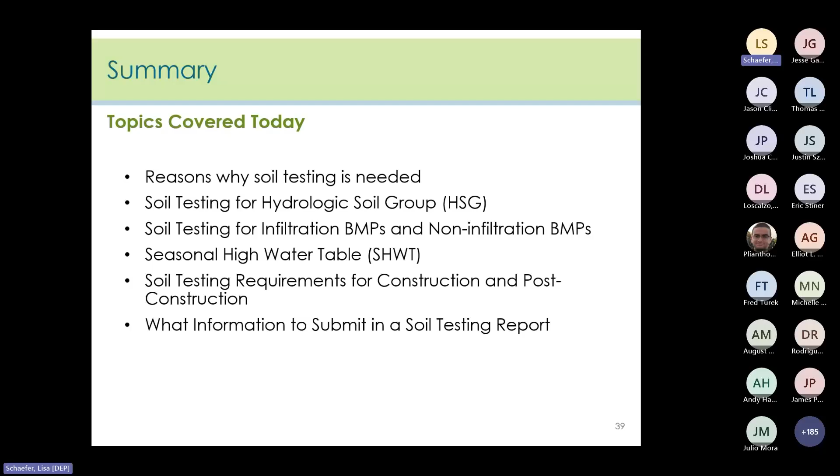All right, so we're going to go from this directly into the next thing because I see what time it is. I know I talk long. Sorry about that. Give me a second.

All right, so GI fact sheet.

In earlier modules, my colleagues introduced what we mean by green infrastructure and some of the regulatory requirements pertaining to it. So we're going to start with a review of this fact sheet to help you better understand the rule requirements and how to use the fact sheet as a rubric to gauge whether or not proposed BMPs are being properly implemented to meet the GI requirements. There are a few short examples also in the fact sheet that I'm going to cover. These are the topics I'll cover in the presentation, so let's dive in.

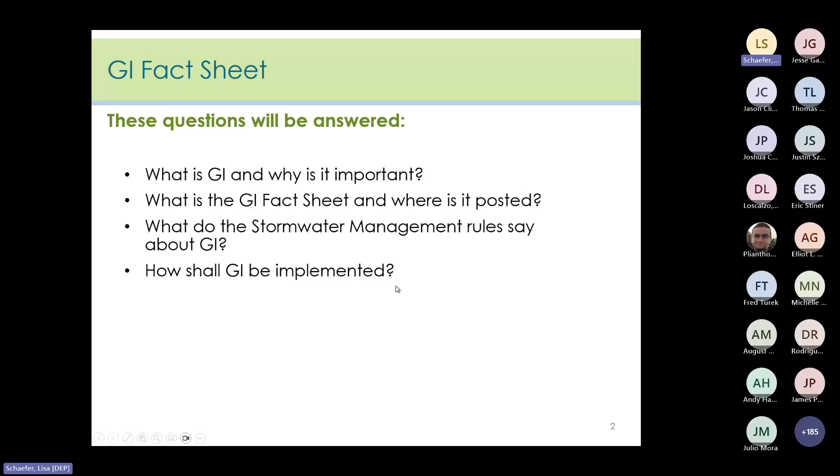It's under item F in this subchapter where you're going to find tables 5.1, 5.2, and 5.3, and those tables list the BMPs and identify whether they're 1, GI, or 2, GI requiring a waiver or variance if used for other than quantity control, or 3, non-GI BMPs. This was covered in Module 1 in the overview presentation.

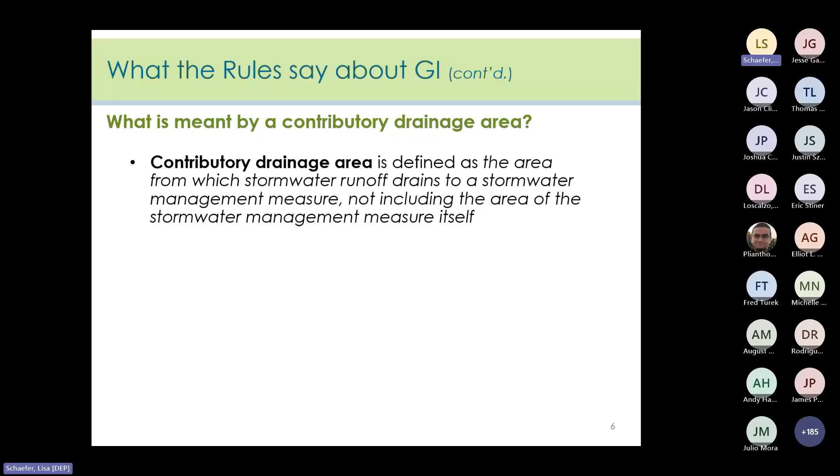On the fact sheet, below the first paragraph on page 1, these limits are restated. Take note that the GI BMPs found in Chapter 9 of the BMP manual that aren't listed here already have one or more design components that limit the size of the contributory drainage area. For example, grass swales have geometric constraints and a maximum depth of flow limitation of 2 inches, and the design criteria will impact how much area can drain to a given grass swale.

Next is how to implement GI into a project or make sure it has been properly implemented. The GI fact sheet is a metric to help you evaluate if a proposed BMP has been properly implemented where the rules require green infrastructure be used.

So what I'm saying is that the reviewer needs to check each BMP proposed as GI to see if it really meets the definition of GI that's in the rules. That means all three of the questions shown here must all be answered with a yes in order for a BMP to meet the GI rule requirement.

All of the GI BMPs proposed must each be reviewed to make sure that the project complies with the rule requirement to use GI. So let's go through these questions individually.

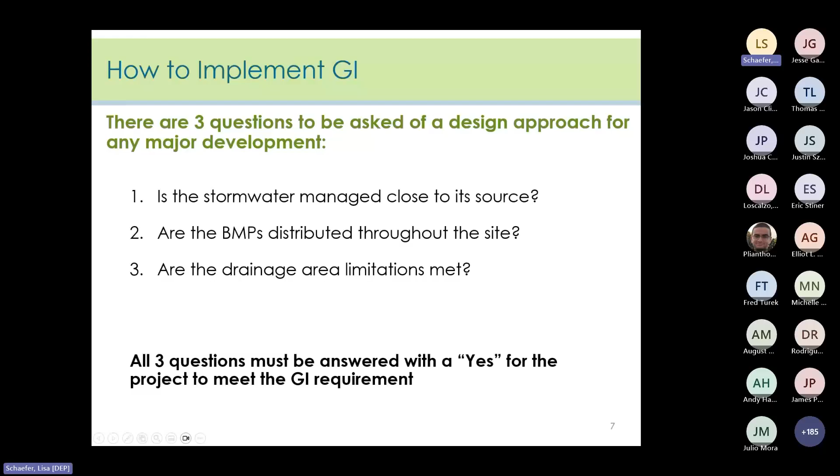So GI manages stormwater close to its source. What do we mean by that? GI mimics the natural hydrologic cycle.

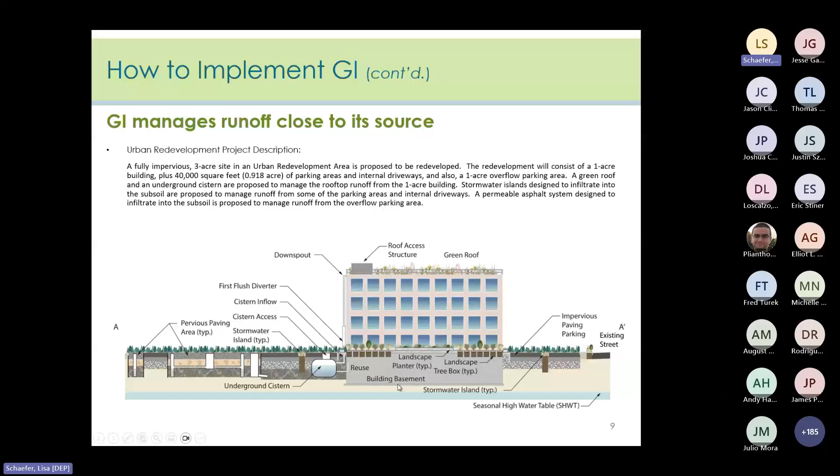The proposed redevelopment is a major development since it will disturb 1 or more acres, and it's subject to the design and performance standards in the rules. However, because it's an urban redevelopment area that was previously fully disturbed and impervious, groundwater recharge is not needed for this case. The proposed condition also reduces the impervious surface for motor vehicles present on the site. This profile is what we mean by placing BMPs close to the source of runoff.

However, due to the proposed GI practices, the project does break up or disconnect flow of runoff over impervious surfaces, and provides low maintenance landscaping that encourages retention and planting of native vegetation, and minimizes the use of lawns, fertilizers, and pesticides.

So in this example, each of the proposed GI BMPs manage the stormwater runoff generated by the redevelopment close to the source. So we can answer unequivocally yes to the first question on the fact sheet.

The next question to be asked is if the GI BMPs are dispersed throughout the site. The last site was a good example.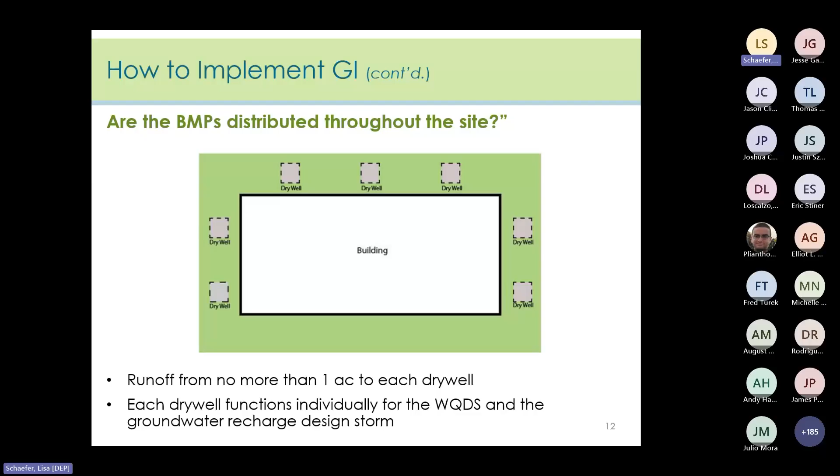Now, if this is part of a larger site where there are additional GI BMPs, this layout's fine, and a separate discharge for each of the 7 dry wells is not necessary. Note that as long as no more than 1 acre of runoff is directed to any individual dry well, the drainage area limitations are met. But to be GI, they must each function individually for the water quality and the recharge storms.

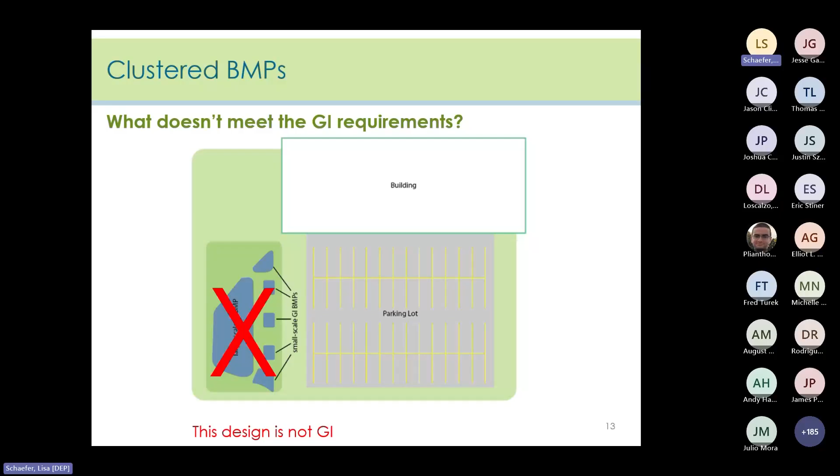All right, so here's another example. The small-scale GI BMPs are all separated by berms and have contributory drainage areas below the maximum. However, they're all shoved over here in the corner. Look how far the building is from this cluster. Plus, there's nothing for stormwater over here, so the BMPs are not near all of the sources of runoff. In conclusion, this design does not meet the definition of GI and therefore does not meet the rules.

All right, the last question we have to ask and answer is whether the contributory drainage area of the proposed GI BMP is less than or equal to the limitation found on the cover page of the fact sheet. And again, it's in the rules at 7:8-5.3.

Small-scale bioretention basins are ideal for use in parking lot islands and where one has typically used in the past that grass strip along the edge of a parking lot or along a roadway. Now, the drainage area limit for this type of BMP is 2.5 acres, and that's generally more than enough for these micro installations, okay?

So GI has a special meaning in stormwater management. Again, it's a stormwater management measure that manages stormwater close to its source by treating runoff through infiltration into subsoil, treating stormwater runoff through filtration by vegetation or soil, or storing stormwater runoff for reuse.

To address water quality, groundwater recharge, and runoff quantity control, the rules require GI be used correctly. So answering 3 questions when you review a design will check if GI is properly implemented on the site, meaning the GI BMPs are located close to the source of runoff, they're dispersed throughout the site, and that the drainage area limitations are met.

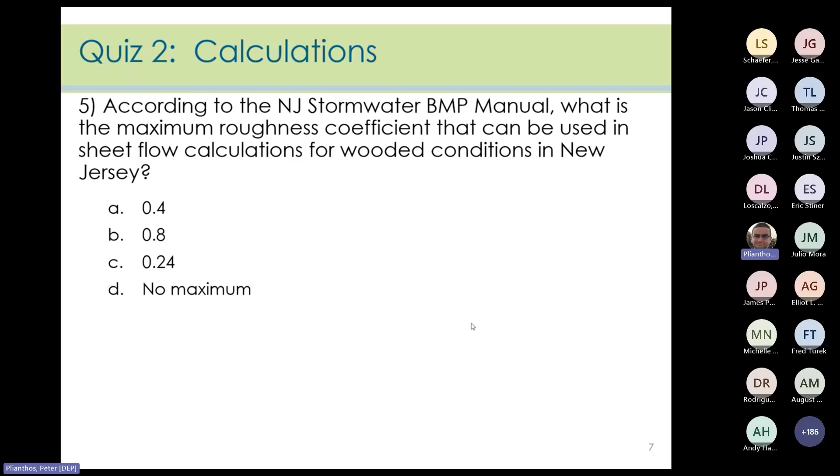Question 5. According to the NJ Stormwater BMP manual, what is the maximum roughness coefficient that can be used in sheet flow calculations for wooded conditions in New Jersey? The correct answer is 0.4. Though the National Engineering Handbook lists Manning's roughness coefficients as high as 0.8 for woods with dense underbrush, for New Jersey, the maximum roughness coefficient for sheet flow that may be used is 0.4. New Jersey does not contain land cover that supports the use of roughness coefficients associated with woods with dense underbrush.

Question 6. What is the maximum sheet flow length for the pre-construction condition, assuming there is no physical constraint present to prevent sheet flow from occurring? The correct answer is 100 feet. For the pre-construction condition, the maximum distance for which we can assume sheet flow occurs is 100 feet, unless there is something physically in contact with the flow of stormwater runoff, such as a swale, curb, or inlet, to prevent sheet flow from occurring. Remember to use the actual distance if it's less than 100 feet. This comes from Chapter 5 of the BMP manual, if you have not taken a look at that yet.

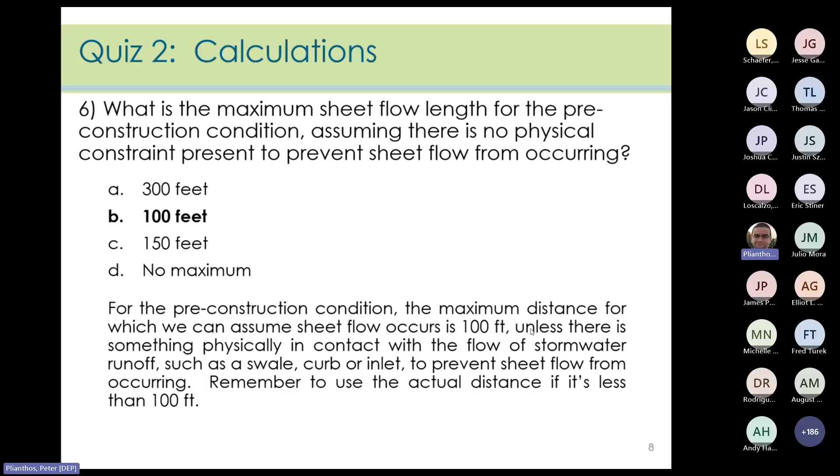Question 7. According to the stormwater management rules, which methodology can be used in the computation of stormwater runoff? The correct answer is A, NRCS method. As of July 17, 2023, the stormwater management rules removed the rational method and modified rational method from N.J.A.C. 7:8-5.7, and only the NRCS method is to be used in stormwater computations.

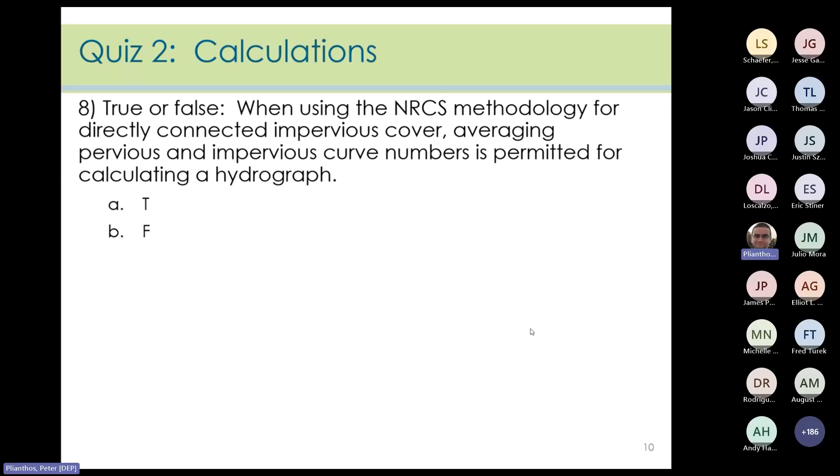Number 8, true or false? When using the NRCS methodology for directly connected impervious cover, averaging pervious and impervious curve numbers is permitted for calculating a hydrograph. This statement is false. Here's a quote from N.J.A.C. 7:8-5.7(a)4. In computing stormwater runoff from all design storms, the design engineer shall consider the relative stormwater runoff rates and/or volumes of pervious and impervious surfaces separately to accurately compute the rates and volume of stormwater runoff from the site. This statement does not apply when using the NRCS composite CN with unconnected impervious area method. See Chapter 5 of the BMP manual for more information.

Number 9. When determining the curve numbers for site design, the design engineer should assume that the condition of the existing cover is good condition - this is the correct answer. This is fairly straightforward. Pre-construction condition curve numbers should assume that vegetated areas are in good condition.

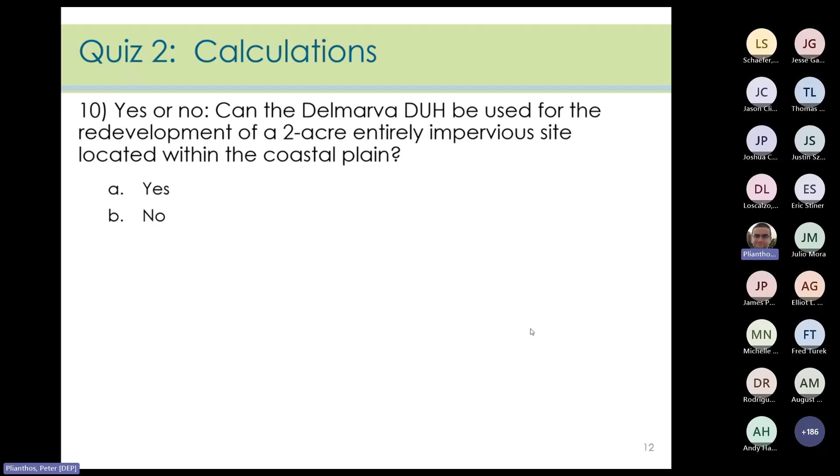Number 10. Yes or no? Can the Delmarva dimensionless unit hydrograph be used for the redevelopment of a 2-acre entirely impervious site located within the coastal plain? The answer to this is no. The Delmarva dimensionless unit hydrograph must be used when modeling watersheds within the coastal plain region of New Jersey, with just a few exceptions. It cannot be used to size a manufactured treatment device, or MTD, as it may underestimate the peak flow rate entering the MTD. Also, for an entirely paved site, the significant surface storage associated with the coastal plain is no longer present, also resulting in underestimated peak flow rates if the Delmarva is used. Additionally, the Delmarva should only be used in areas that have an average watershed slope less than 5%. If any of these situations are proven to be present, the NRCS standard dimensionless unit hydrograph must be used. As a side note, if the Delmarva is used in the pre-construction condition, it must also be used in the post-construction condition. Same idea goes for the NRCS.

Question 11, true or false? When using the NRCS methodology for calculation of stormwater runoff, the type 3 distribution must be used for developments in New Jersey. This one is false. As discussed in the calculations presentation from today, NOAA C or D distributions must be used, not the type 3.

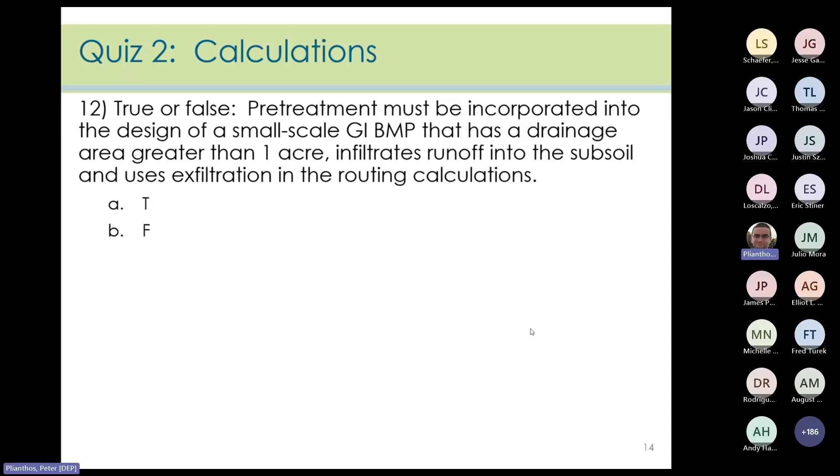Question 12, true or false? Pre-treatment must be incorporated into the design of a small-scale GI BMP that has a drainage area greater than 1 acre, infiltrates runoff into the subsoil, and uses exfiltration in the routing calculations. This one is true.

All small-scale GIBMPs, which are designed to infiltrate into the subsoil and have contributory drainage areas greater than 1 acre, must include pre-treatment of stormwater runoff when using exfiltration in the routing calculations.

Question 13. Soil testing logs prepared in accordance with Chapter 12 are required for which of the following BMPs? The correct answer is all of the above. They all have a minimum separation from the seasonal high water table, which you can find in their respective BMP manual chapter. Soil testing will therefore be required for all of these to ensure that they meet the required separation.

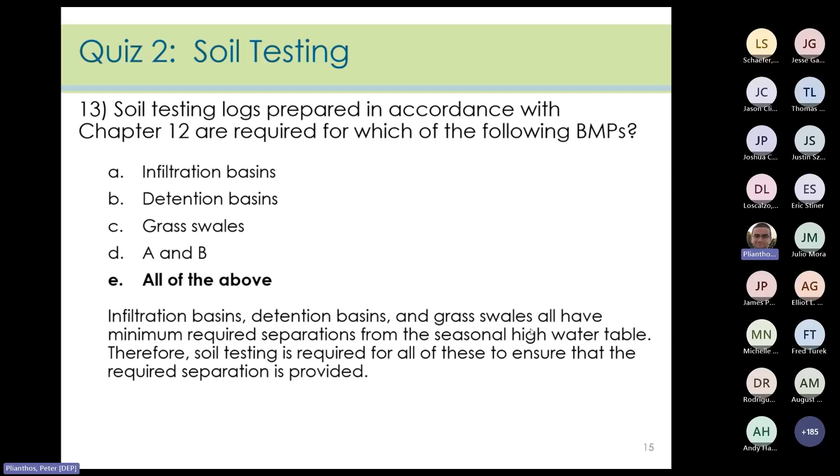Number 15, yes or no? During the month of July, can the seasonal high water table be determined by measuring water levels directly within a soil exploration if the mottling does not indicate redoximorphic features are present within the soil exploration? And the answer is no.

If mottling does not indicate redoximorphic features are present within the soil exploration, the seasonal high water table may be determined via direct observation of water levels only between January and April. For more information on determining the seasonal high water table, see subsection 1D of Chapter 12 of the BMP manual.